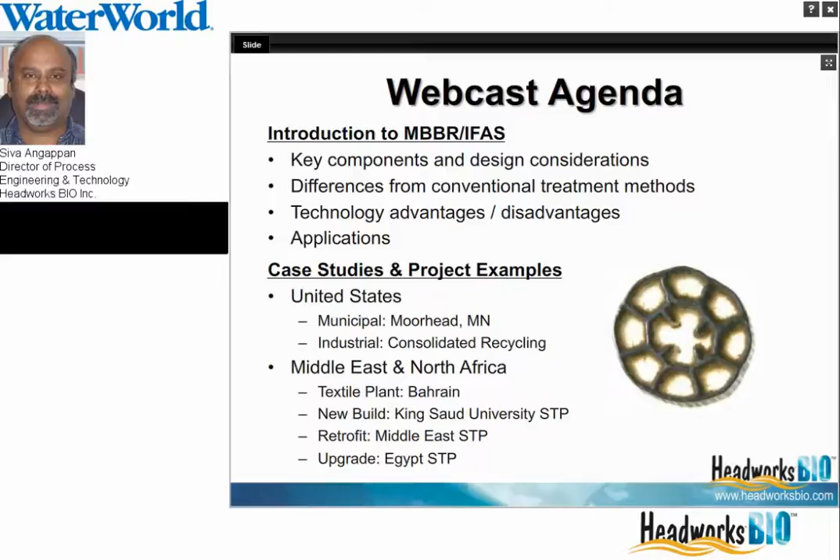Biological treatment technologies for wastewater treatment can be classified into two parts: suspended growth, which includes activated sludge, and attached growth, which includes fixed film technologies. In activated sludge, we have a number of variations, including SBR and MBR. In fixed film or attached growth technologies, we have trickling filters, rope media, RBCs or rotating biological contactors, and MBBR. Most of these technologies can be combined, that is, attached growth and suspended growth can be combined to form a new technology called IFAS, which is Integrated Fixed-Film Activated Sludge.

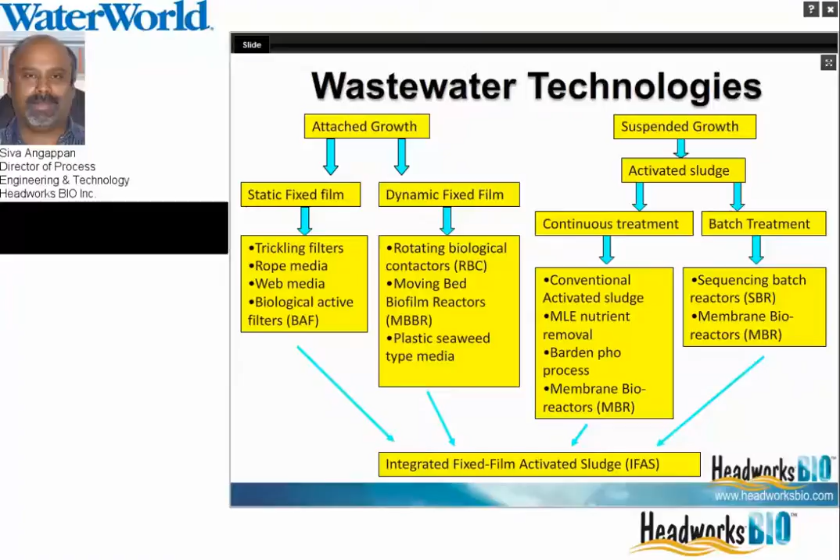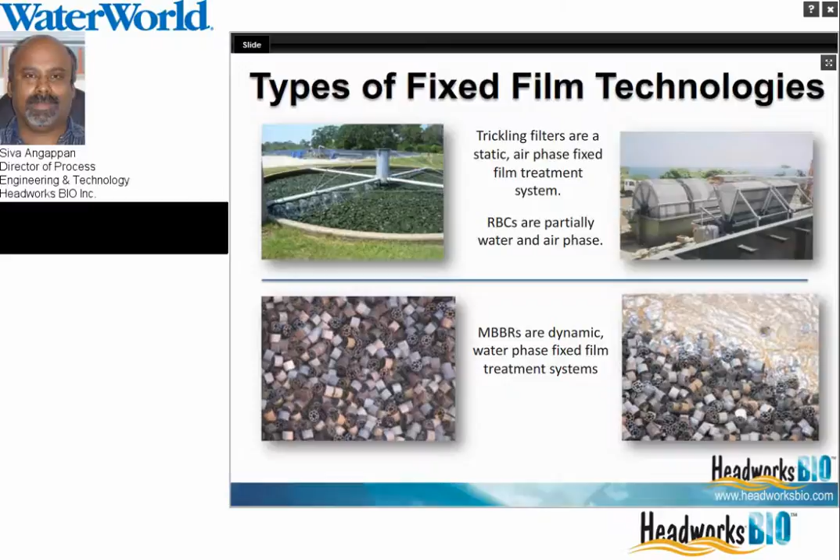There are a number of different technologies that use a bed type of approach, like fluidized bed. In this moving bed, the entire bed is moving around continuously and vigorously. Typically, the carriers used, or the plastic media used, have a specific gravity of less than 1, so it's easy to mix within the reactor.

There's a number of documented research, case studies, and presentation publications regarding moving bed biofilm technology.

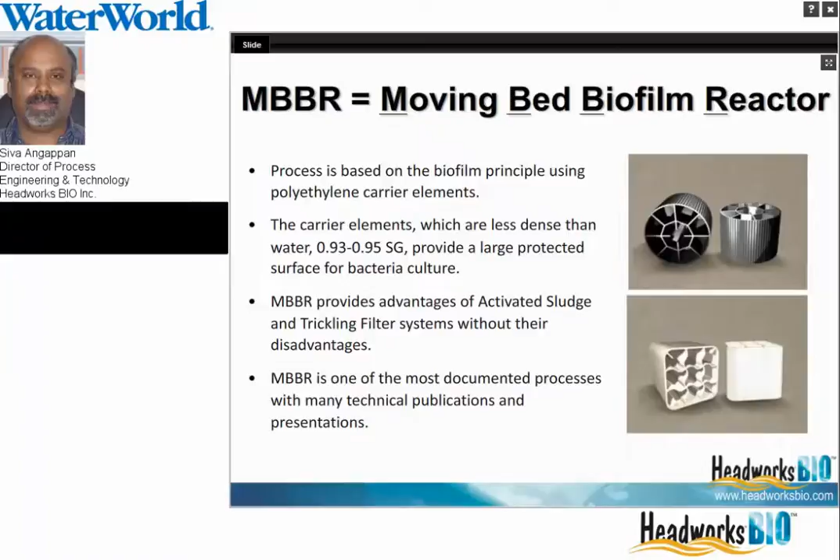How does a biofilm work? The biofilm is formed on the surface of the plastic media, where hundreds of layers of biofilm are formed during acclimatization. The biofilm is basically a boundary layer between the surface and the substrate. The substrate contains all the contaminants to be oxidized, and the biofilm contains all the bacteria. The substrate is continuously mixed around, and all the contaminants like BOD, COD, and different organic compounds get into the biofilm, and oxygen also diffuses into the biofilm. On the surface of the biofilm, bacteria oxidizes the contaminants, and the products of the oxidation are sent back to the substrate and go out of the reactor. This is the general principle of the biofilm.

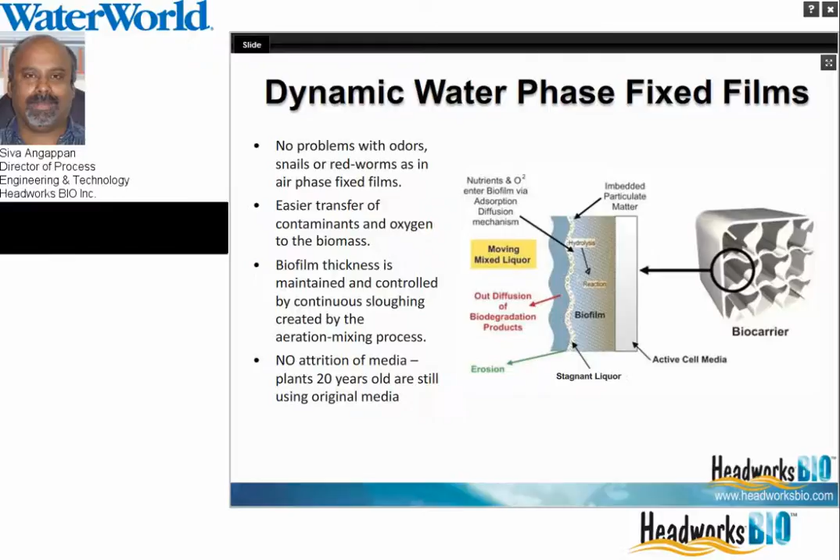The key components of a biofilm reactor are the aeration grid, the retention screens, and ActiveCell media, which is our specific brand media. The aeration grid provides the air required for oxidation as well as for mixing. The retention screens keep the plastic media inside the reactor and let only the treated water out. The media is where the biofilm resides.

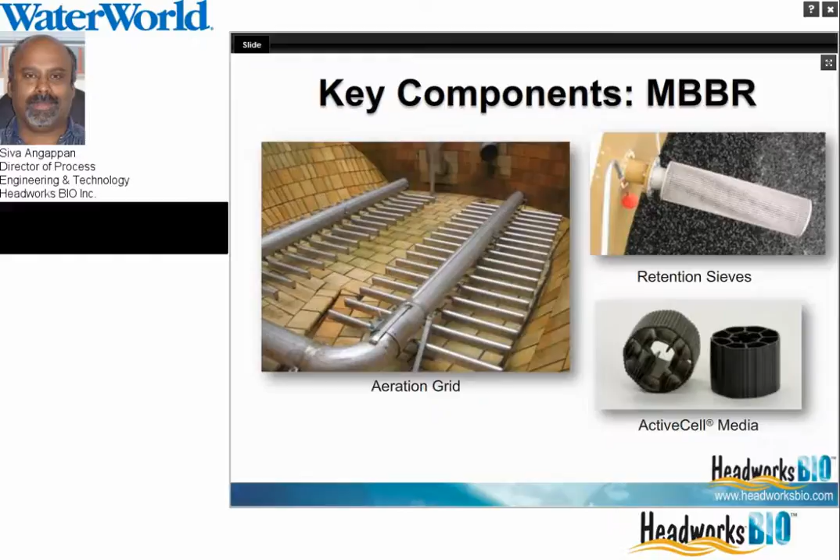In more complicated projects, you will have a requirement for an anoxic reactor, where nitrates are removed by anoxic bacteria to form nitrogen gas. In certain other configurations, you will have retention screens that can be retracted for easy cleaning and put back in service.

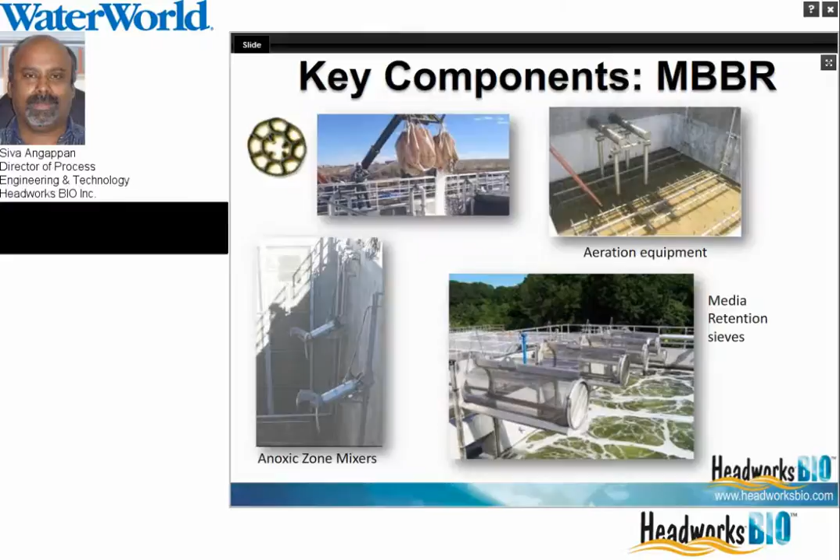How does a biofilm look like? For the BOD bacteria, the biofilm looks either greenish or grayish. In the nitrifying bacteria, the biofilm is usually red. It takes a few weeks for the biofilm to form during an acclimation process. After that, the biofilm is self-sustaining and automatically adjusts to the load.

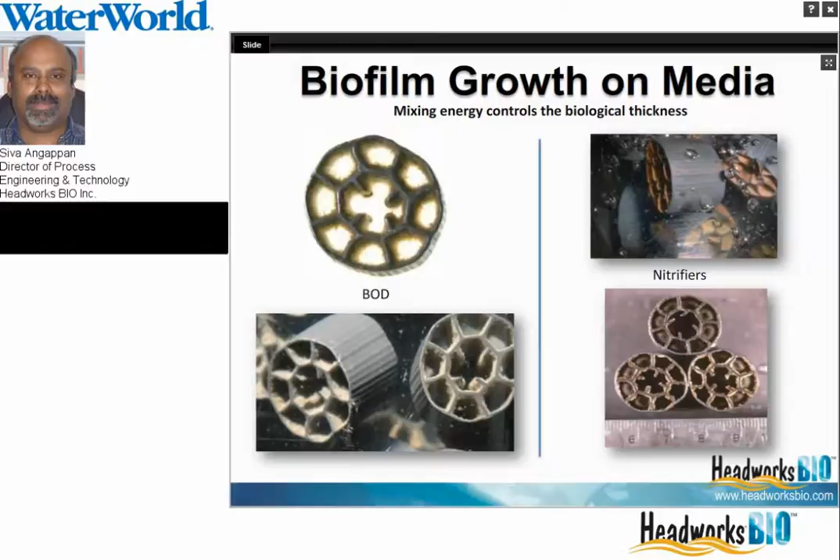So what is the difference between IFAS and MBBR? MBBR is a once-through process; there is no recycle of the waste sludge or recycled sludge. In IFAS, the activated sludge or the MLSS is recycled back to the front of the reactor. So you'll have two levels of biological activity: one in the suspended growth with the MLSS, and the other in the attached growth on the biofilm.

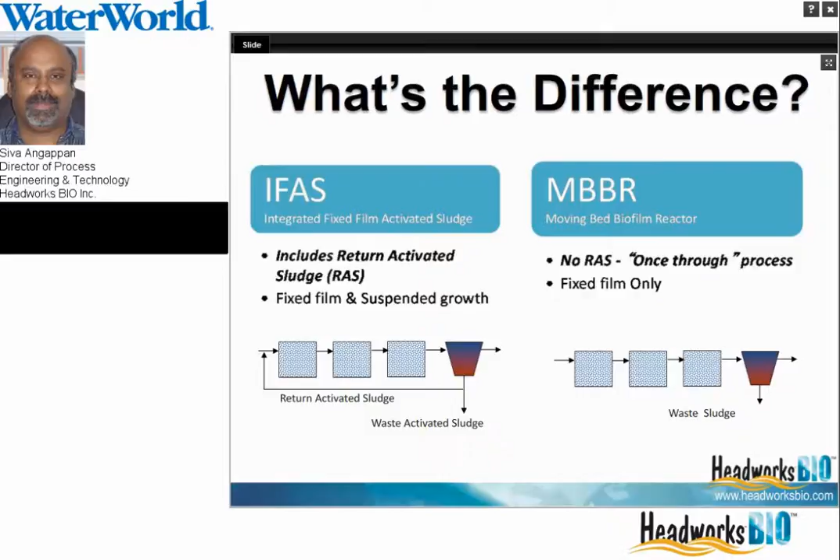So why would you select MBBR over IFAS, or IFAS over MBBR? The key parameters are how much space you have, and whether it's a new site or an existing site. If you already have an activated sludge plant with clarifiers and all the supporting works, it makes sense to go for the IFAS process. So all you need to do is add media and additional air if required and retention screens. By doing that, you can expand the capacity of the system within the same tanks or same footprint. You can also meet additional requirements for nitrogen removal or phosphorus removal.

In MBBR, the process is very simple to operate because it's a once-through process. There is no recycle, so you don't need skilled operators. There are a number of MBBR plants we have which need only 15 minutes of operator attention per day. Whereas in IFAS, there is a need to maintain the MLSS at a constant level. So if we have skilled operators, it makes sense to go for IFAS, and if you don't want a full-time operator, then it makes sense to go for MBBR.

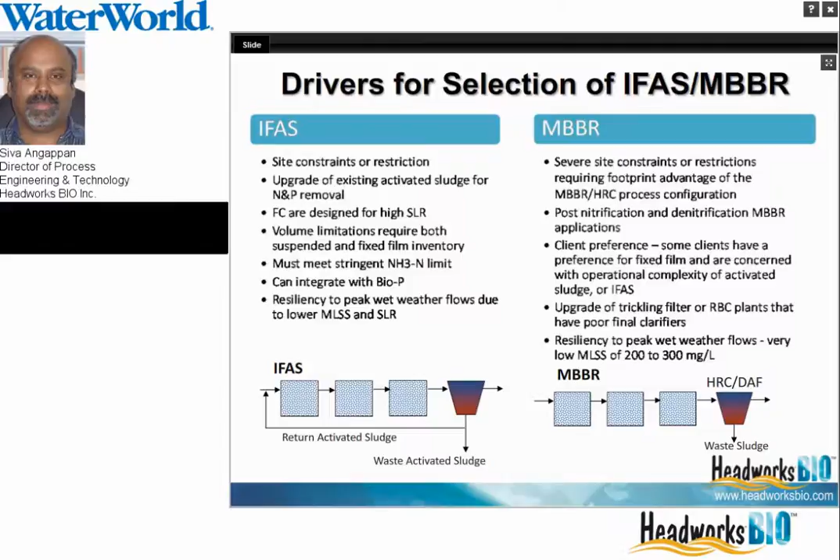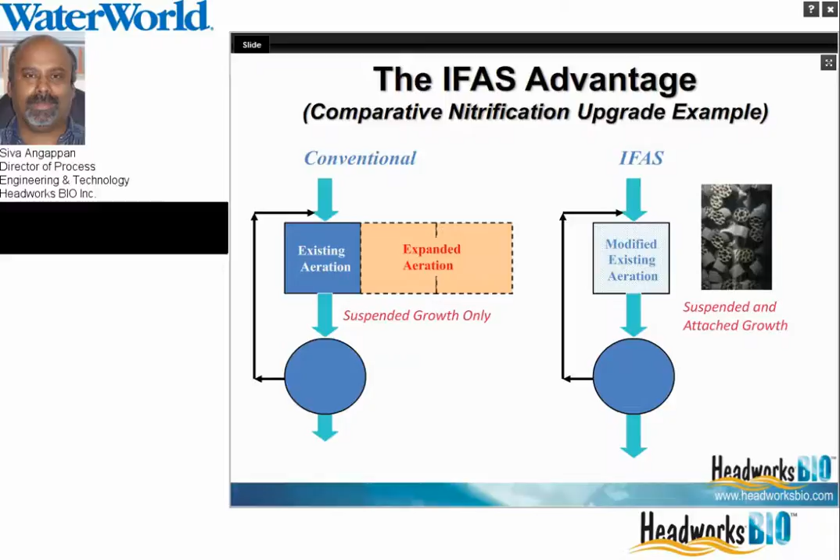This is a conceptual example of modifying an existing conventional activated sludge system into an IFAS. The blue square on the left is the existing aeration tank at an activated sludge plant. If you want to expand the process with activated sludge alone, you will have to add more tankage to meet new requirements or expand the flow capacity. Whereas with IFAS, you can keep the same tank and add the media into it, meeting new requirements as well as increasing the flow capacity within the same volume.

This is a more concrete example of how to do it. Let's say you have a 10,000 cubic meters per day water flow and 200 cubic meters of tankage, meeting only BOD requirements. We can convert that into IFAS by dividing the existing tank into two tanks, one for BOD and the other for nitrification, adding new requirements for ammonia nitrogen. The flow can be increased by 50% to 15 MLD, or 15,000 cubic meters per day. By doing this, we have met the new requirements for ammonia as well as increased the flow by 50%. This is one of the most common implementations of the IFAS process.

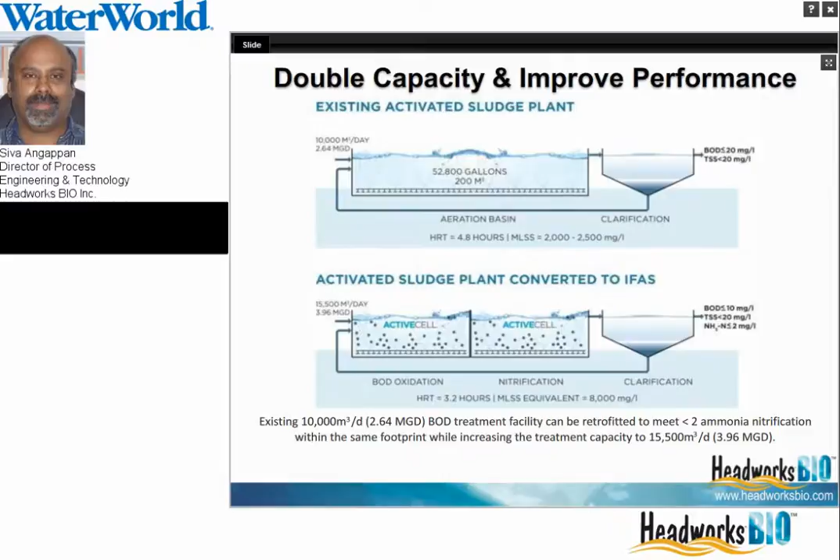So how do we design MBBR or IFAS processes? It's just like any other biological technology, you need to consider temperatures, dissolved oxygen, and nutrients. In biofilms, hydraulic retention time is much less than activated sludge plants for a simple BOD or nitrification process. Typically, it's a half to a quarter of what's required for activated sludge plants.

More importantly, the primary design factor used for designing MBBR and IFAS is the loading rate. That is grams per day of BOD or ammonia or nitrogen per square meter of the surface area of the media. So what you do is take the total load in grams per day and divide by the total amount of surface area of all the carriers in the reactor. That's the design factor we use.

So if you are designing a high rate system, you could use as much as 15 to 25 grams per square meter per day for BOD. Or if you are trying to meet very low limits and you're trying to do it in a single reactor, that should be a low loading rate situation. For nitrogen, biofilms can easily handle up to 1 gram per square meter per day.

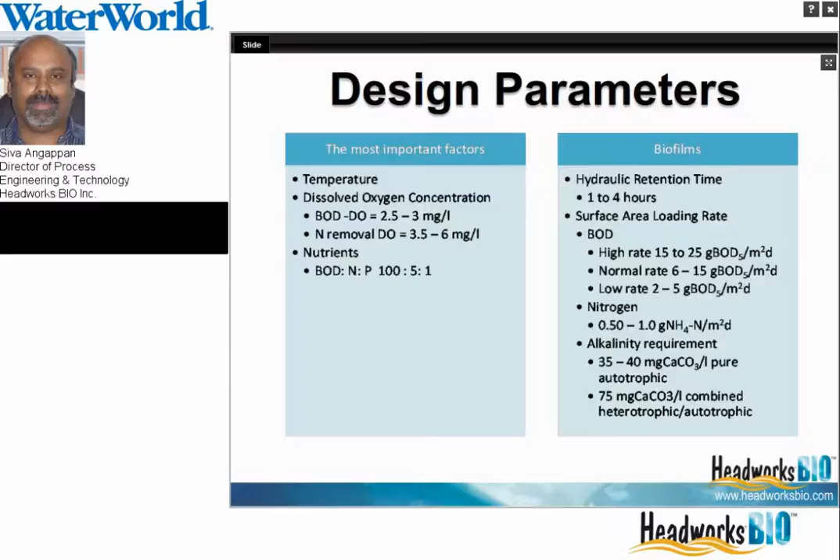So in the next part, Afnan Din will go over the MBBR and IFAS technology in more detail.

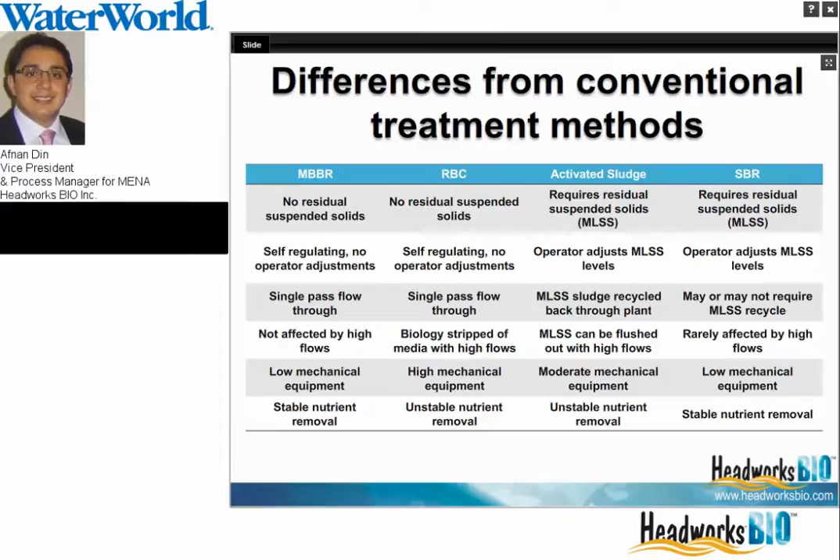Hello everyone, thanks Siva. I'll talk to you a bit about the differences from conventional treatment methods when you compare MBBR. What I've done is split the technologies into four, and we're looking at two attached growth processes and two suspended growth processes. MBBR and RBCs are two common attached growth processes, and activated sludge and SBR are two suspended growth processes. The differences in the technologies really stem from the fact that one set is an attached growth process and one set is a suspended growth process.

So if we compare MBBR with RBCs, one of the key differences is the footprint. MBBR is a super small footprint compared to an RBC. The second key difference is in the operation and maintenance. Compared to an RBC, an MBBR has absolute low mechanical equipment. There's no maintenance required of the media or the retention sieves. The only maintenance required would be with the diffusers, if any. Whereas in RBCs, there are motors, there are rotating contactors, so there's far more maintenance required with an RBC.

Now, in terms of activated sludge and SBR, both of those are a suspended growth process. Again, compared with MBBR, MBBR offers the smallest footprint of the three. The key difference between an activated sludge and an MBBR would be in the operation and control. An activated sludge requires you to control your mixed liquor and have a sludge age, whereas an MBBR process is an attached growth process. In terms of nutrient removal, an MBBR process is far more stable than an activated sludge process.

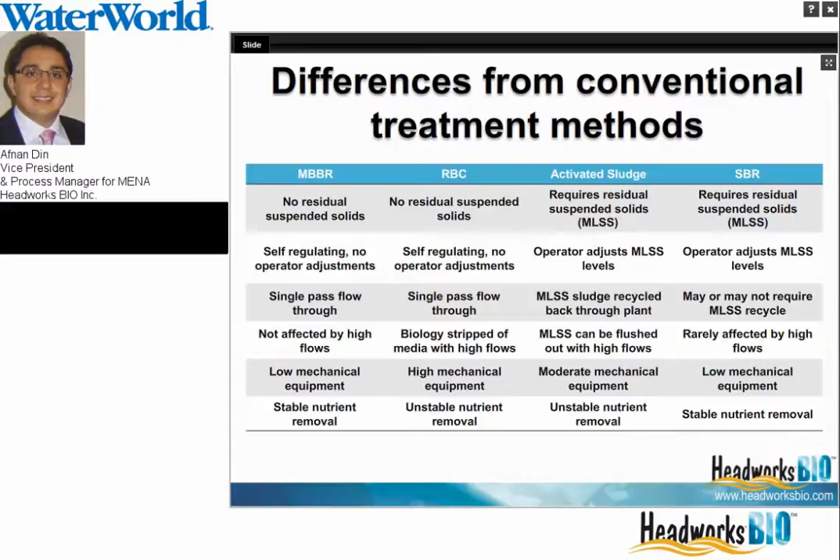Moving on to comparing two of the most popular technologies these days, the membrane bioreactor and the MBBR. One of the key differences is the capital investment. Although membranes over the years have become far more cost competitive, they are still very high in capital cost compared with the media for an MBBR. The footprint, both plants offer you small, super tight footprints. An MBR can operate with a mixed liquor of up to 12, 15,000, if not higher, and an MBBR operates with an equivalent mixed liquor, because it's an attached growth process, of about 8 to 10,000.

In terms of power requirements, as we know, blowers consume the most power on a wastewater treatment plant. If you look at the number of blowers or the amount of power required on a membrane bioreactor compared with a moving bed biofilm reactor, both processes require blowers for aeration to provide oxygen for oxidation and removal of organics, but there's far more power required in an MBR because you have recirculation pumps, and most importantly, depending on the type of membranes you go for, you have air scouring blowers, which basically prevent your membranes from fouling. Neither of those are required for MBBR.

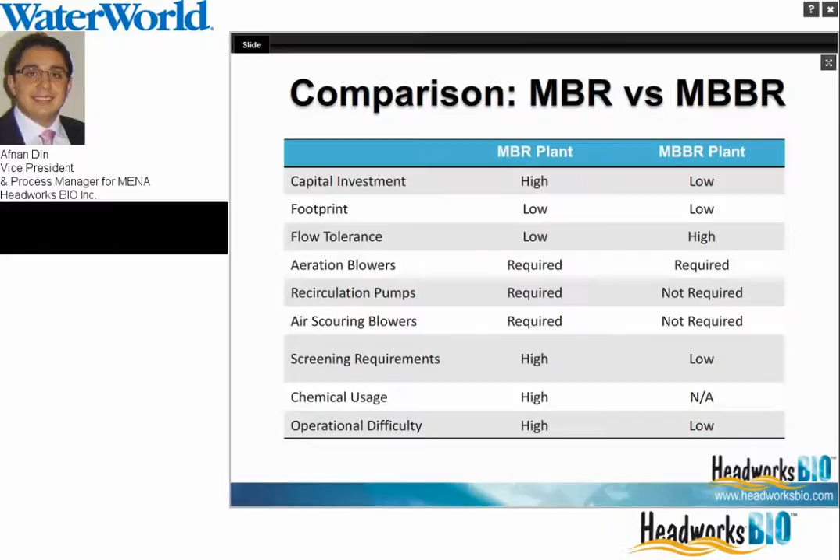So we looked at MBBR earlier, and Siva touched on the difference between IFAS and MBBR. Just to recap, the key difference is that one is a straight-through process and one has a return loop. The return loop of the activated sludge from the clarifier provides you with the suspended growth. That's the key difference between IFAS and MBBR. In IFAS, we say Integrated Fixed-Film Activated Sludge, so it contains both suspended and fixed film.

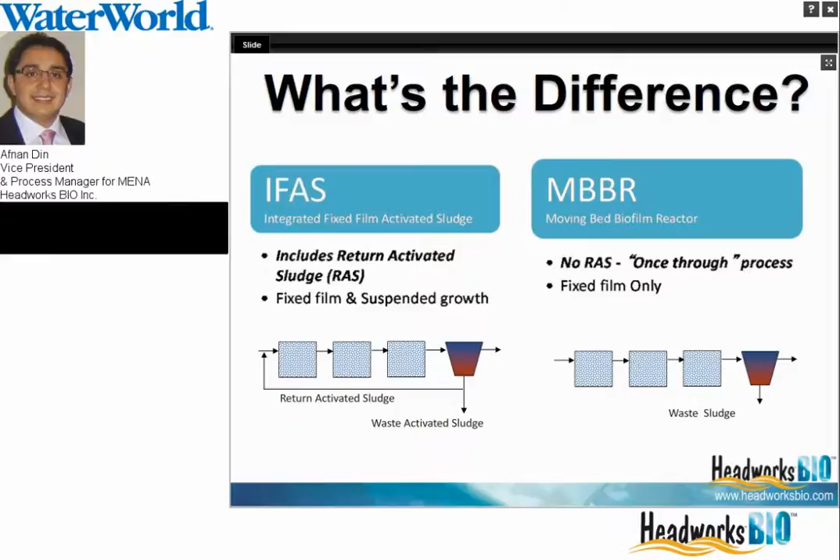The advantages of IFAS and MBBR - why would you consider an IFAS or MBBR? One of the key advantages is that it's a self-regulating process. The biomass is self-regulating, so there's no requirement to actually control your mixed liquor. Because it's an attached growth process, the thickness of the biofilm attached to the media is either thick or thin, depending on your influent load. That's a natural process.

One of the key benefits is that it offers a flexible design to allow future upgrades. If you have an existing MBBR or IFAS reactor, and as we all know, plants after a period of time need to be upgraded - populations go up, incoming flow increases, effluent standards get tighter - it's very easy in terms of flexibility to retrofit these plants, because by playing around with the fill fractions of the media, you can create a higher specific surface area for the growth of biofilm.

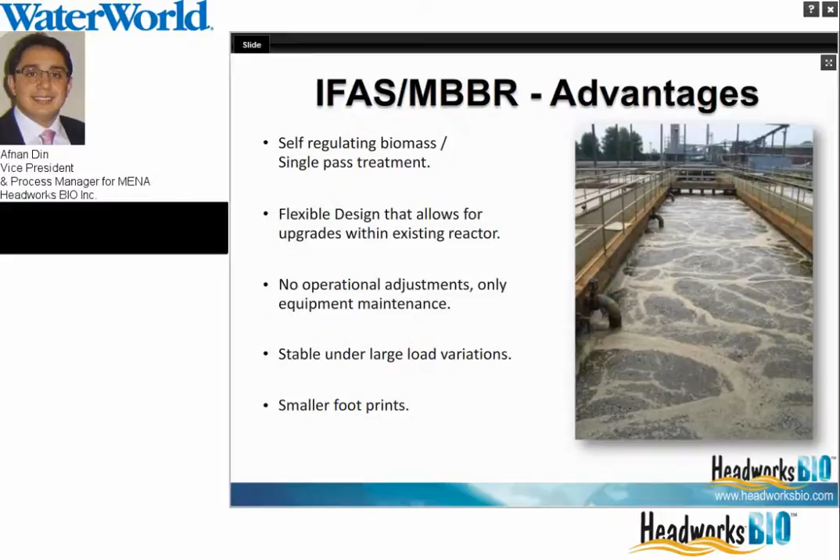In terms of operational adjustments, an MBBR is a fairly simple process to operate, especially because the control is not necessarily required as much as you'd find on other technologies. It's stable under large load variations. Typically, if you have a labour camp or a hotel resort, which is likely to have seasonal variations or peaks and low loads at certain times of day due to usage, a biofilm process operates a lot better because of the self-regulating biomass nature. And as we understand, it's a very small footprint - very compact because the media allows you to have a higher specific surface area.

Now looking at the different types of applications where you could use MBBR. Well, the first application is simple - BOD, COD removal. So an MBBR is a biological process that removes all various types of organics.

The second type of application could potentially be as a post-nitrifying reactor. There are various flexibilities with MBBR as to how you apply it. For example, if you have an existing lagoon which is only for carbonaceous removal, and you'd like to nitrify the effluent, you could add an MBBR as a post-nitrifying step downstream of the lagoon.

And lastly, you could simply have a process where you denitrify, remove BOD, followed by nitrification and post-denitrification, depending on your nitrogen limits. If you notice on the denitrification drawing, it's very similar to an MLE process - like an activated sludge process in terms of configuration, but with added media inside the reactor. So you still have an internal recycle, you still have a return activated sludge, and if need be, you'll have a carbon source.

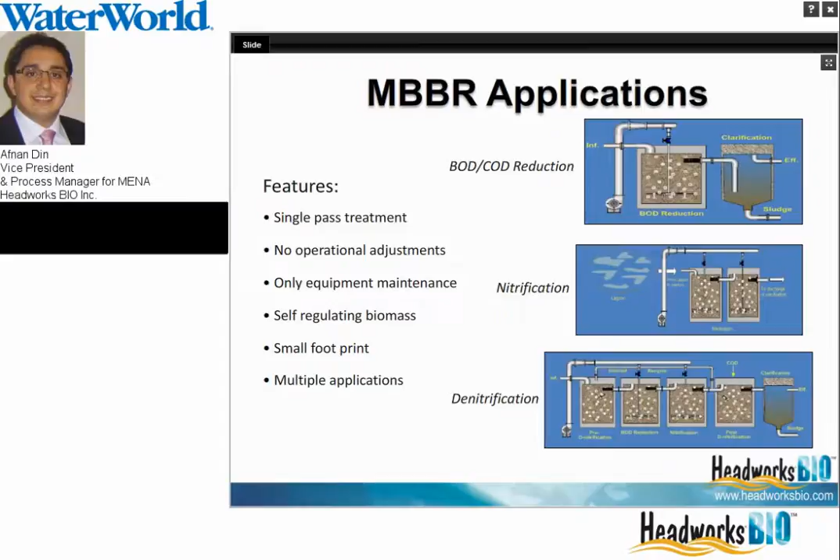What we're seeing on this slide is an example of an IFAS application. We have an existing plant for carbonaceous removal only, with BOD and TSS removal, so the effluent limits are less than 30 milligrams per litre.

Now, if we have an existing activated sludge plant operating like this, which needs to be upgraded or retrofitted to give better performance, let's say less than 1 ammonia, we can retrofit the existing activated sludge plant into an IFAS and improve the effluent quality all within the same space.

There are various ways we could do this without increasing the space requirements. For example, in the first case, we could convert the existing plant from a carbonaceous removal only to a nitrification plant, giving you ammonia less than 1 within that same space.

If you wanted to denitrify, depending on your total nitrogen limit, you could split that reactor into 3 steps of pre-denit, BOD reduction and nitrification, or 4 steps of pre-denitrification, BOD reduction, nitrification and post-denitrification.

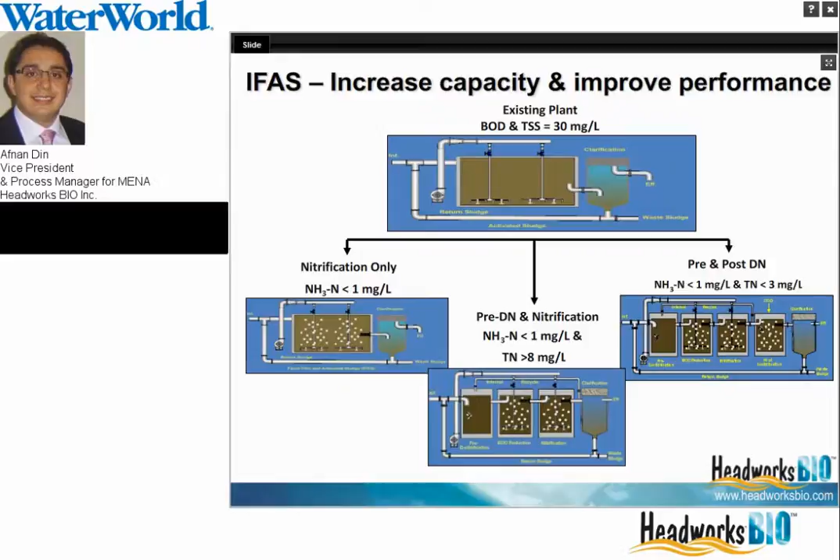For example, if you have an existing activated sludge plant and you would like to retrofit this for nutrient removal, this is a very common requirement these days. Consents are getting tighter, environmental agencies are imposing tighter limits, and there are requirements for nutrient removal.

One way we could retrofit an existing plant into nutrient removal is similar to how I explained earlier. We would create inside the aeration tank separate tanks of BOD reduction and nitrification by converting them to IFAS. This allows an available volume for anaerobic treatment and pre-denitrification.

This allows for suspended growth sludge age such that you can tailor it for maximum phosphorus removal. You allow suspended growth in your BOD reactor, nitrifying reactor, and then you can create a volume for your anaerobic treatment.

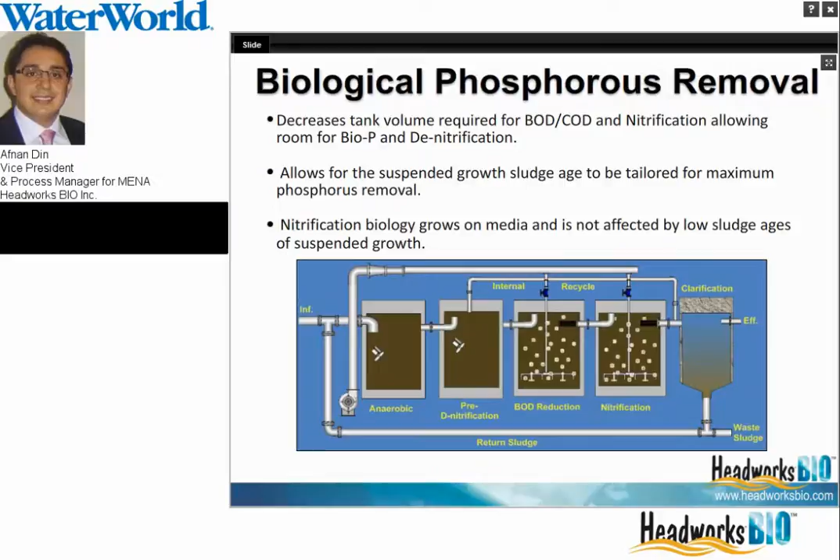I'll pass you over to Siva, who will be talking to you a bit about our project in the United States.

Thank you, Afnan. I'll be talking briefly about our municipal project in Minnesota and an industrial project in Indiana.

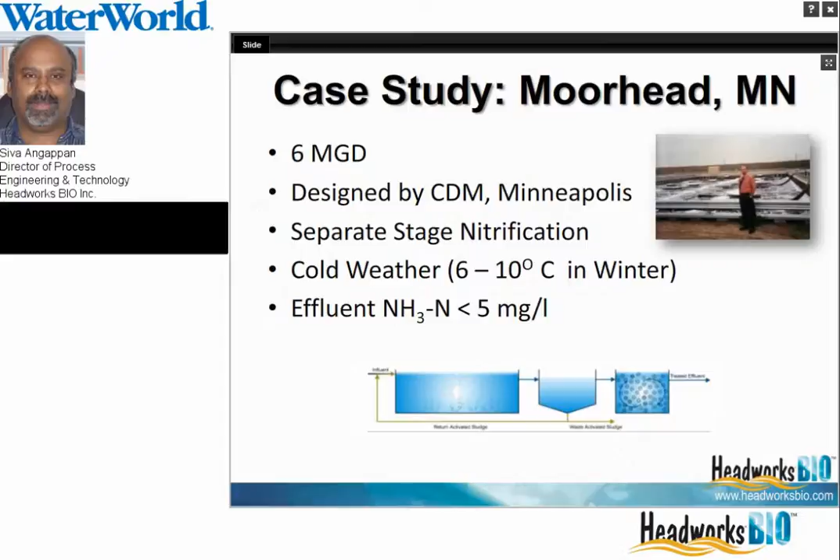Moorhead, Minnesota is in very cold weather. The wastewater temperature can reach less than 10 degrees most of the winter. They have an existing Purox plant which was meeting BOD limits, and they had a new requirement for ammonia. So we decided to install an MBBR for this particular project as a separate stage.

What that means is this nitrification process is after the secondary clarifier. Initially they looked at the existing lagoons to nitrify the wastewater, but it's not going to work based on the temperature. So we installed the MBBR process for the nitrification.

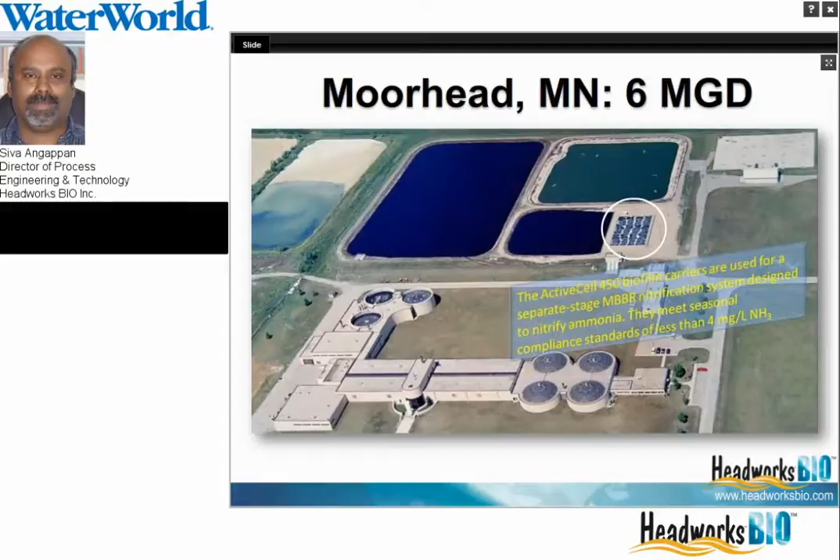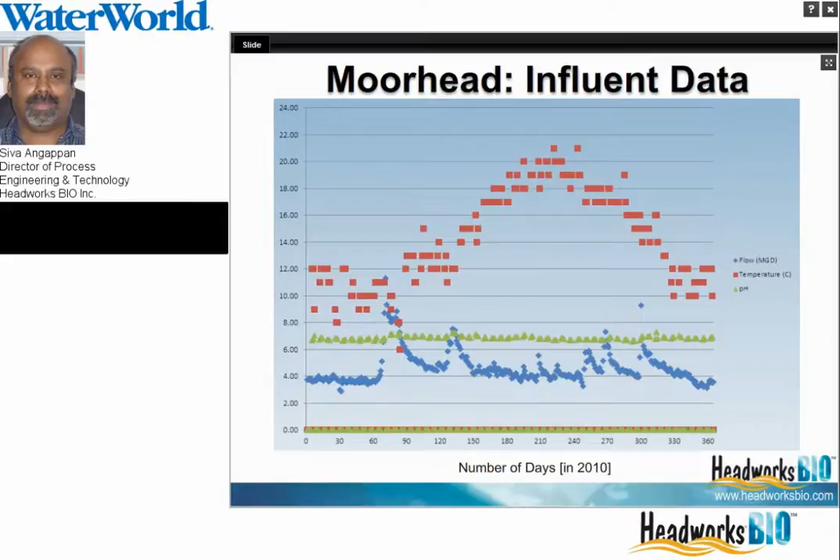These are some data for the wastewater influent. The flow is typically between 4 and 8 mgd. The temperature is highly variable depending on the season, so in winter the temperature can reach 6 degrees centigrade. The pH is quite constant.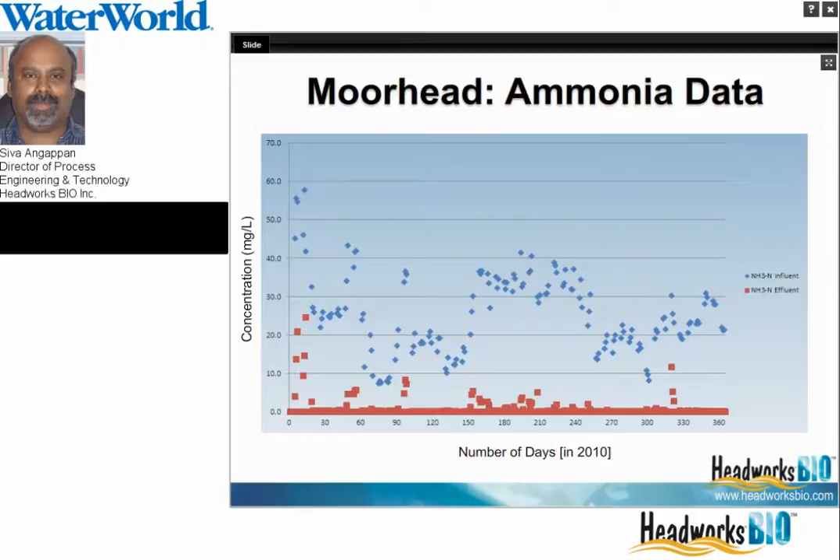We sampled the wastewater at different points throughout the year, for different seasons, and this is how the data points look. The general conclusion is that if you have a high loading rate, the removal rate will drop.

This information can be used in two different ways. You can design two reactors, the first being high loads and the second being low loads. So if you have a very stringent limit, you should either use low loading rates with a single reactor, or you can use two reactors, the first one being high load, second one being low load.

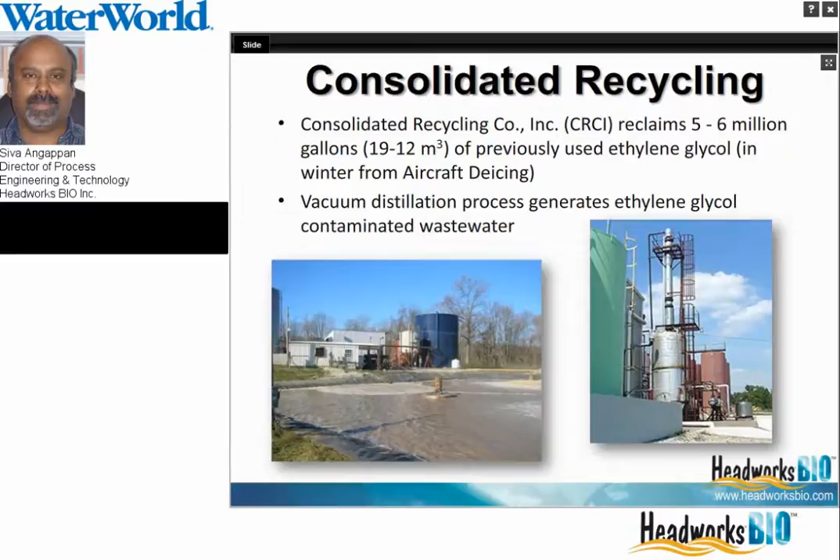This particular plant is quite complicated because it's an industrial application, and there could be a lot of inhibitory substances. So we decided to do complete design based on testing rather than designing a complete system and trying to operate it. We started with a plan to do batch testing to get preliminary design factors, then continuous flow testing, and use that information for the full-scale design.

The COD is 15,000 milligrams per liter, and the BOD is around 10,000 milligrams per liter. They had a requirement to meet COD of less than 550 milligrams per liter, and phenol of less than 2 milligrams per liter. As you know, phenol is difficult to oxidize using biological oxidation, so that's an important consideration.

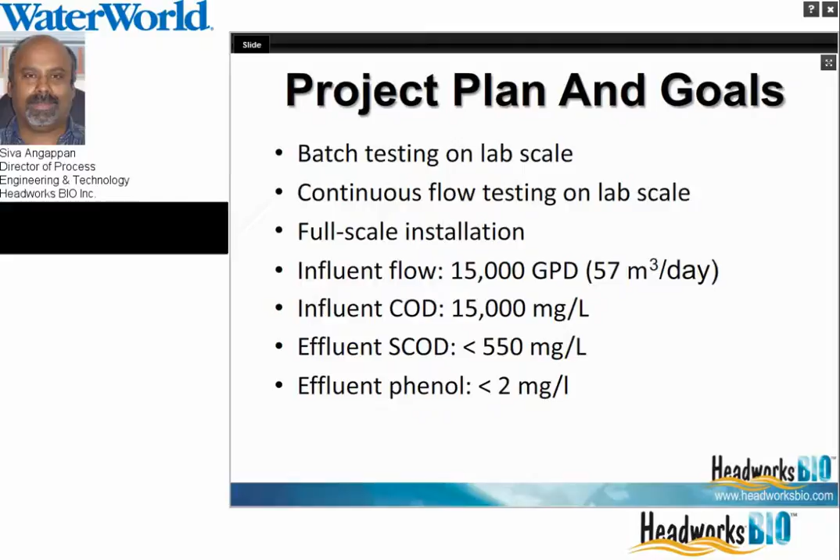In the lab testing, we made a simple tube-type reactor, 14 liters in volume, put in the media inside, and used spargers to disperse air into the reactor, and nutrients were added.

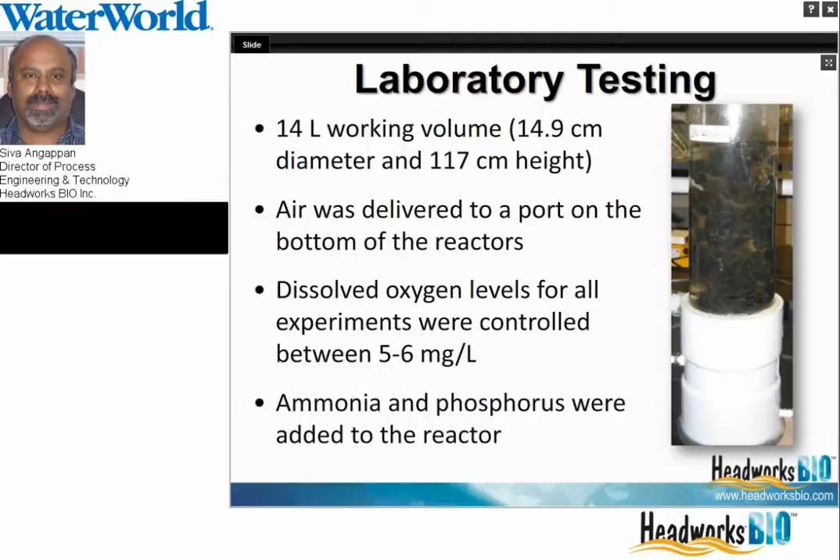Batch testing is simple: you start with a batch of wastewater and see what happens to the concentrations of COD over time. Based on this testing, the COD over time drops from 12,000 down to less than 1,000 within about 100 to 150 hours. That gives us a preliminary indication of how to size the next step, which is the continuous flow reactors.

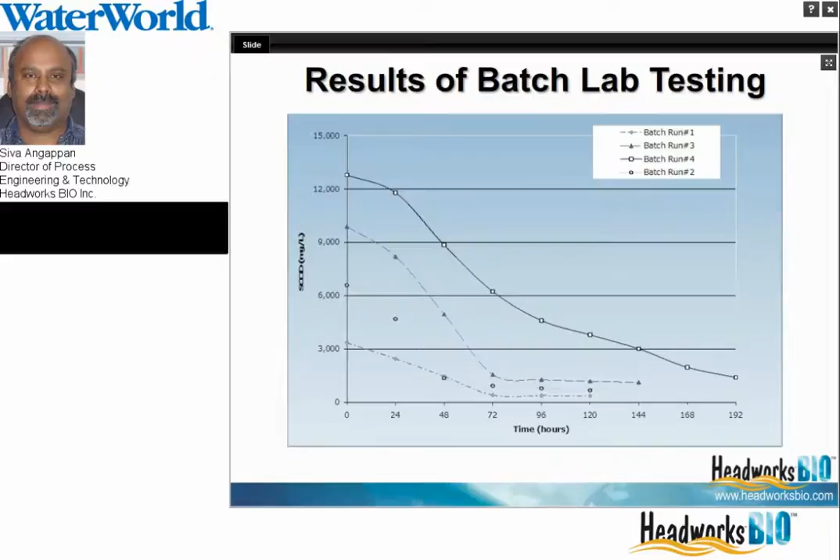Using similar reactors, we prepared an initially diluted sample, and then ramped it up later with full strength wastewater. We started with a 2-to-1 dilution, and then acclimated the reactor over a few weeks.

Once acclimated, you'll see that the COD influent is quite constant in the blue line, and after acclimation the COD effluent also comes down after about a month or so. At that point, the system reached maybe 90% of the design capacity.

We also varied the hydraulic retention time after the system reached most of its capacity. We reduced the flow rate, which increased the hydraulic retention time, to see the effect. In this case, this is a single-stage reactor, so at this stage, the increase in hydraulic retention time did not make any difference to the treatment performance. That proved that our design factor is primarily surface area loading rate, not hydraulic retention time, after a certain retention time is reached.

We also used a flocculation step to see if COD could be reduced further. We saw that COD can be reduced further by 50% by using a chemical coagulation flocculation step.

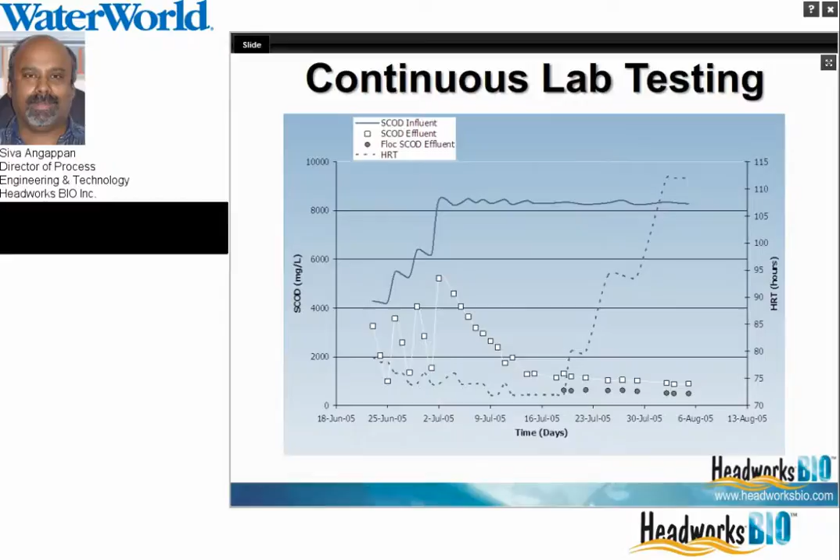Based on this information, we designed a full-scale system as a single-stage reactor, wanting to keep it simple since they didn't have a lot of operators to run the system. We wanted a single stage and also wanted to have a lot of capacity for future expansion.

That's why we went with a carrier fill fraction of around 30%. This reactor is about 95,000 gallons, which is about 5-6 days of hydraulic retention time, giving ample space for expansion. We also included a flocculation step and a clarifier.

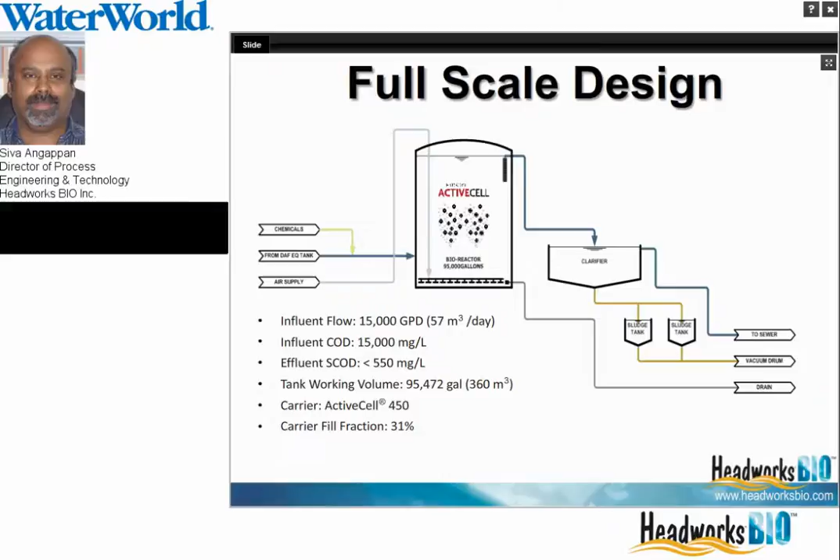We wanted to compare the results of the full-scale system to the lab scale or pilot testing. The full-scale system initially started around 5 to 10,000 milligrams per liter, and on a long-term basis averaged around 8 to 10,000 milligrams per liter. The effluent after acclimation was always less than 500 milligrams per liter.

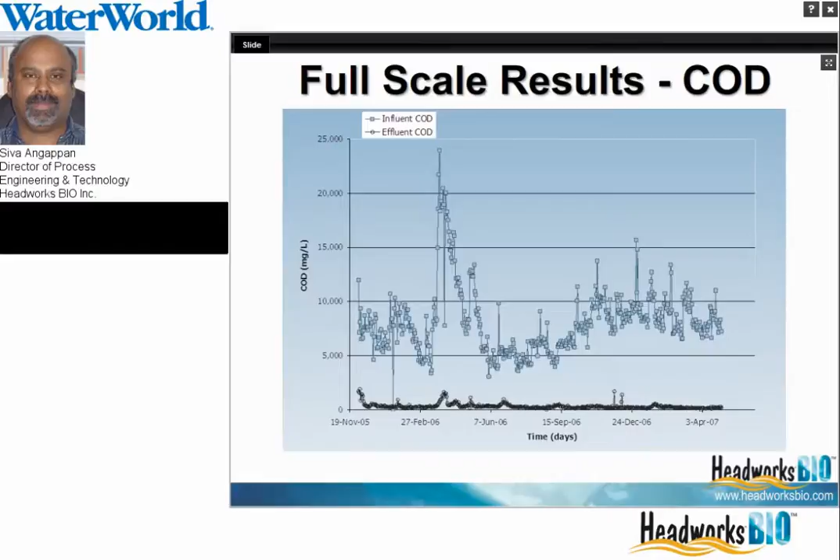And we wanted to see the effect on phenol. Based on those results, we always met the 2 milligrams per liter limit for phenol.

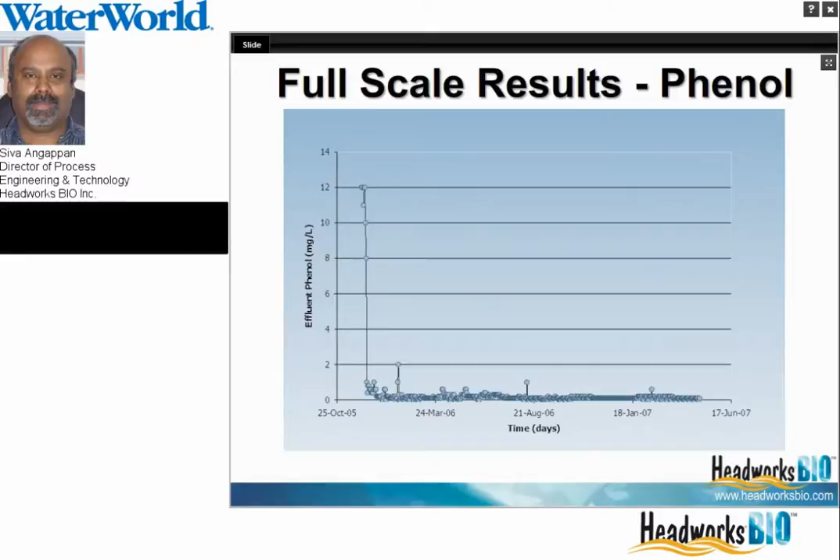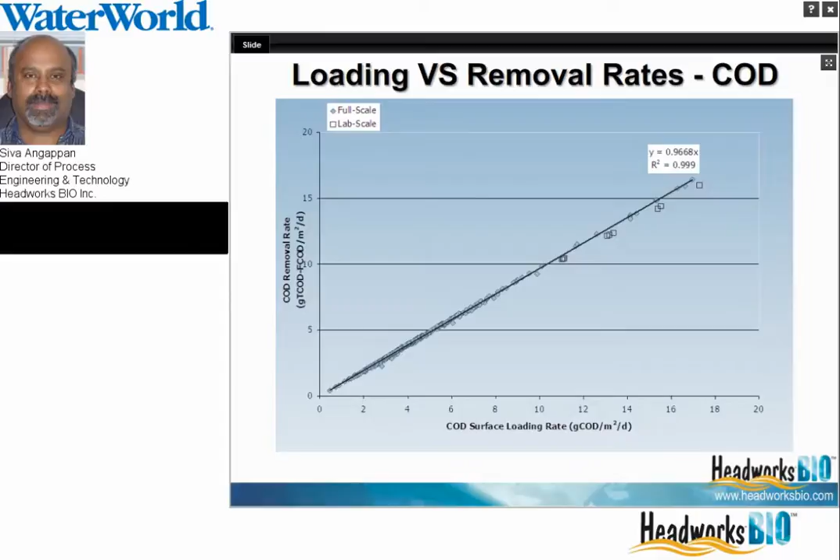Now Afnan will go over a few more projects, mainly in the Middle East and North Africa region. Thanks, Siva. I'll quickly go through these to give you an update on what we are working on in the Middle East and North Africa. A lot of these projects are actually in the execution phase, either undergoing installation now, commissioning, or under construction.

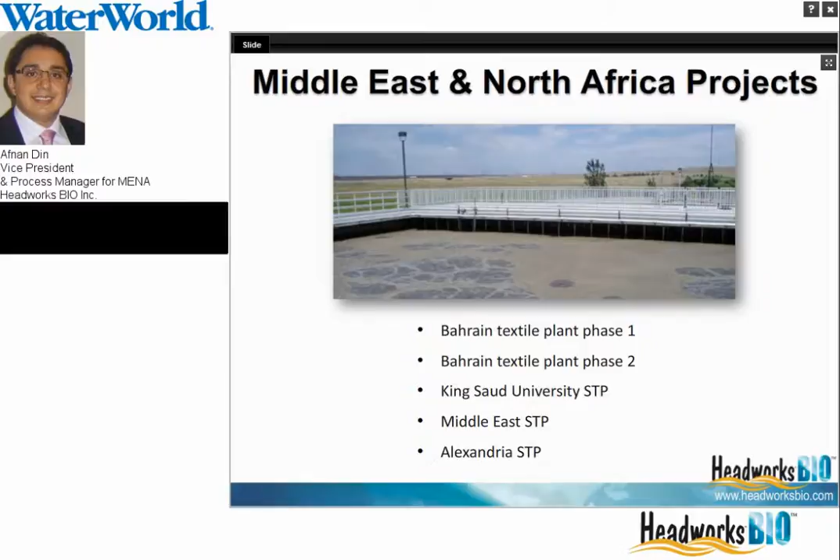So the first project I'll have a look at is a nice blend here - you'll get to hear a bit about industrial treatment, a plant we've done for a university, and another retrofit plant in Egypt. So the first project is a textile factory, a denim factory in Bahrain, an interesting plant.

It's actually an existing MBBR, so there were a few challenges here. One challenge was that the plant was not working, both in terms of treating the influent loads and in terms of the media. There was a problem with the media - it was sinking, so I'll explain why.

Basically, the challenge here was that we had to increase capacity and improve effluent quality. The effluent is discharged into the Bahrain harbour, and the client was incurring fines from the environmental agency.

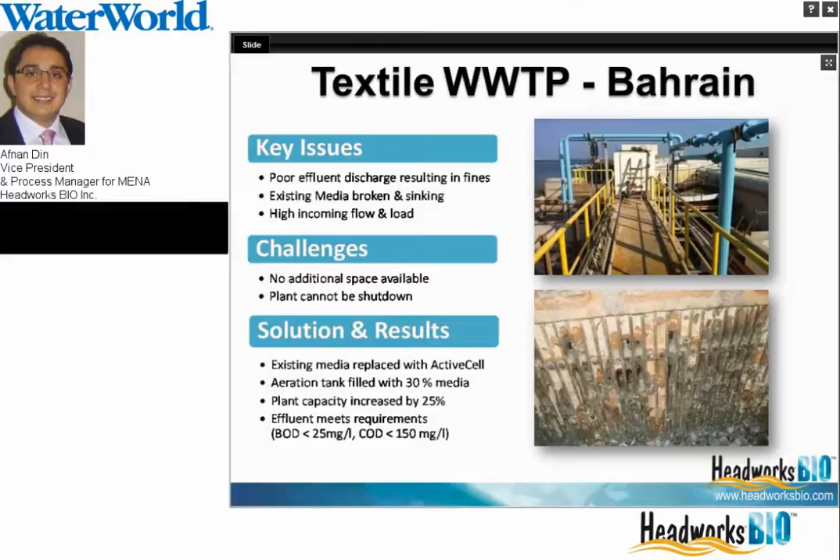So what we did was replace the existing media in the 3 MBBR reactors with 30% ActiveCell media, and we guaranteed an increase in plant capacity by 25%, and that we could meet an effluent requirement of less than 25 BOD and less than 150 COD.

If you look at the current performance of the plant, while it was treating 250 to 300 cubic meters per day, it was giving a BOD effluent of 250 milligrams per liter and a COD effluent of 1,000 milligrams per liter. The limits were far less - less than 50 for BOD and less than 250 for COD.

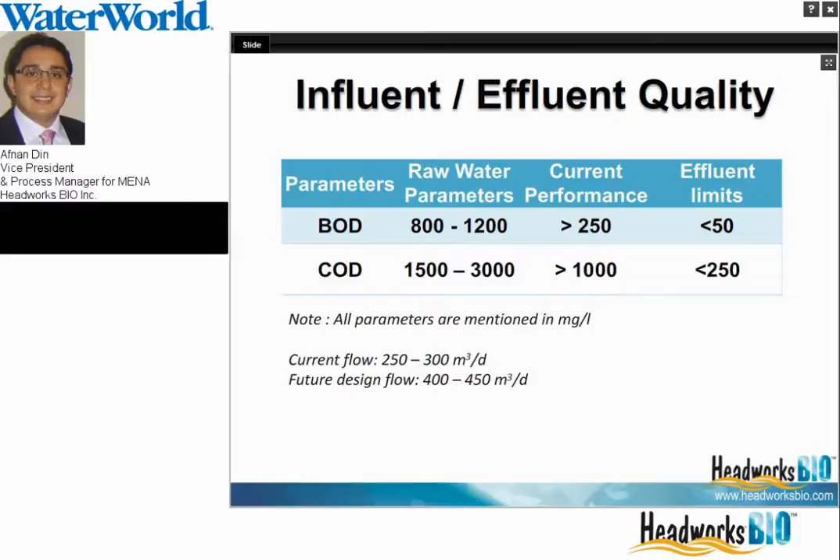So by retrofitting the 3 reactors with MBBR, we were able to increase capacity by 25% to a future design flow capacity of 400 to 450 cubic meters per day. The plant was commissioned earlier this year in January, and these pictures show the media entering the reactors during commissioning. The bottom left shows the seeding process, and the bottom right is the MBBR in operation.

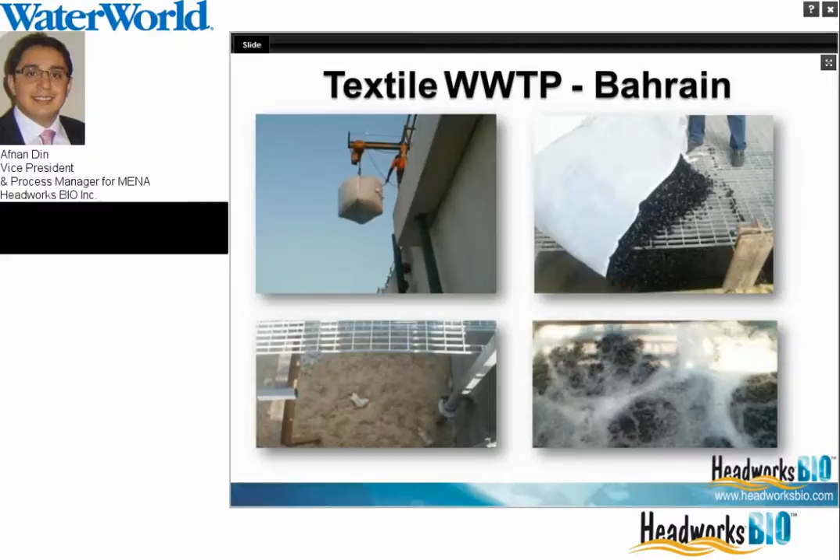A quick summary of the results: initially when we were starting up the process, after the seeding phase, the flows were kept relatively low, roughly about 200 cubic meters per day, then roughly about 75 to about 100 cubic meters per day.

Throughout the whole sampling process, the outlet COD is below the desired effluent quality. Towards the end of January, after about 4 or 5 weeks of feeding the plant with slightly lower flows than designed, we started to increase the flows by the first week of February. The plant is now receiving its design flow between about 300 to 400 cubic meters per day. The inlet COD concentration throughout the whole sampling period was very high, but the loads were obviously lower initially while we were seeding. As you see, the effluent COD is always below 250.

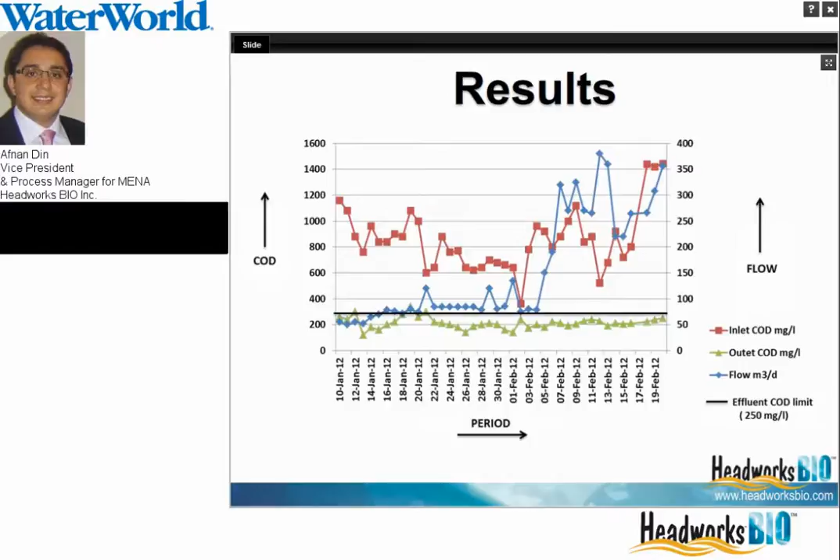As I explained earlier, this plant was very unique for us in the sense that it was an MBBR and it was not working. The client did not have much options on how to retrofit the plant, because with an MBBR you already have a very small footprint. So he certainly could not turn his plant off, could not build new reactors - there was a huge shortage of space. So what we had to do was carry out a feasibility study and look at why the existing plant was not working.

Not only is the specific gravity less than water, so basically it floats, but the specific gravity of active cell is between 0.92 and 0.96.

What happens with the media is that the properties it's made of can potentially, after a few years of operation, have reactions with contaminants inside the wastewater, which changes the density of the media. These reactions cause the properties of the media to change, so over time that media starts to sink. Even though you have aeration and air being provided, the media is not fully mixing inside the reactor, which means your rate of reaction is lower, as well as a deteriorated effluent quality.

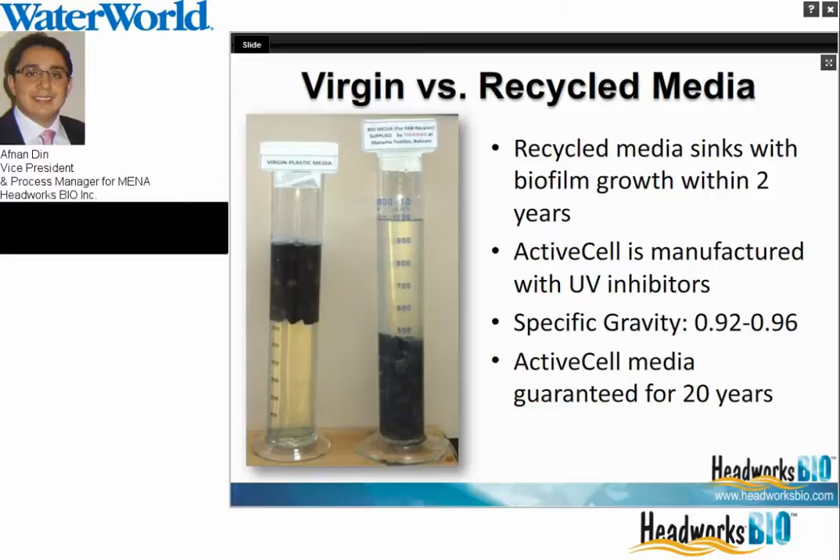One of the next projects I'd like to briefly touch on is what we're doing in Egypt. This again is a very unique application, a perfect example that membranes aren't suitable for every solution. They had an existing membrane plant running for about 5 years — Zenon membranes, hollow fiber — and after about 4 years in operation, the membranes absolutely fell apart. The fouling was immense; they were running these membranes at very high flux rates.

They were cleaning them on a weekly basis using tons of chemicals, and having to replace the membranes and take them out for cleaning. So it was an operator's nightmare. What the client actually did was shut down the plant — for 2 years, the plant was shut down.

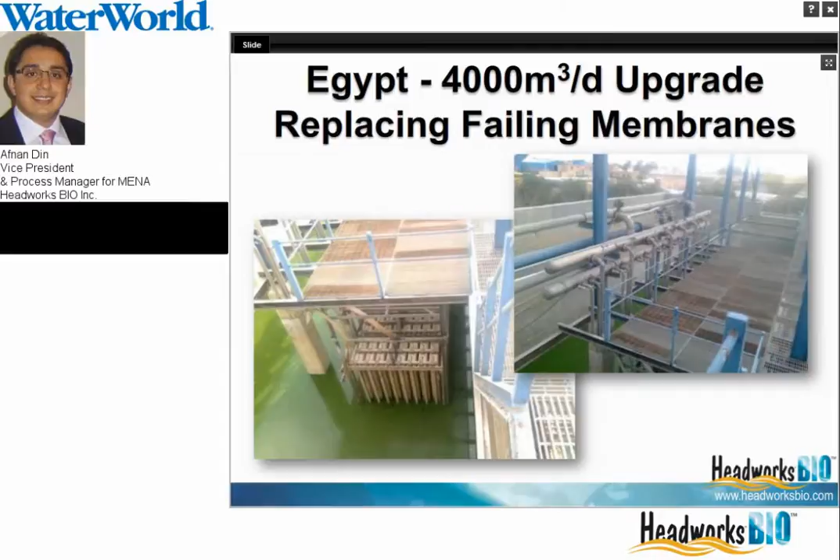Then the client looked into technologies available that could retrofit this existing membrane reactor. The key thing the client wanted was a technology low in operation and maintenance — idiot-proof, easily operated — and secondly, a technology which could fit into the existing MBR reactor. The only technology available that could fit into the existing MBR reactor was an MBBR. So what we're doing is removing the membranes, refurbishing the tank, converting it to an MBBR, and adding a Headworks-designed clarifier to provide the complete solution.

This plant is a 10,000 cubic meters per day plant for a university, based in Saudi Arabia, in the capital city. One of the key drivers for this university — the oldest in the country, located in the capital — was they wanted a wastewater treatment plant with low visual impact, that gives minimal odors, and that's easy in terms of operation and maintenance.

One of the key challenges for the university is that it experiences seasonal variations. Because of the students and summer terms, there will be variations depending on how many students are on campus. So one of the criteria was a technology that could handle such variations in load.

An MBBR really fits well into all those criteria because it has a small footprint, so in terms of visual impact it's very convenient. Secondly, in terms of operation and maintenance, we understand MBBRs are very simple to operate. And thirdly, in terms of total area, it's really just 16 meters by 20 meters. This plant would provide the university with 10,000 cubic meters per day of reuse effluent quality.

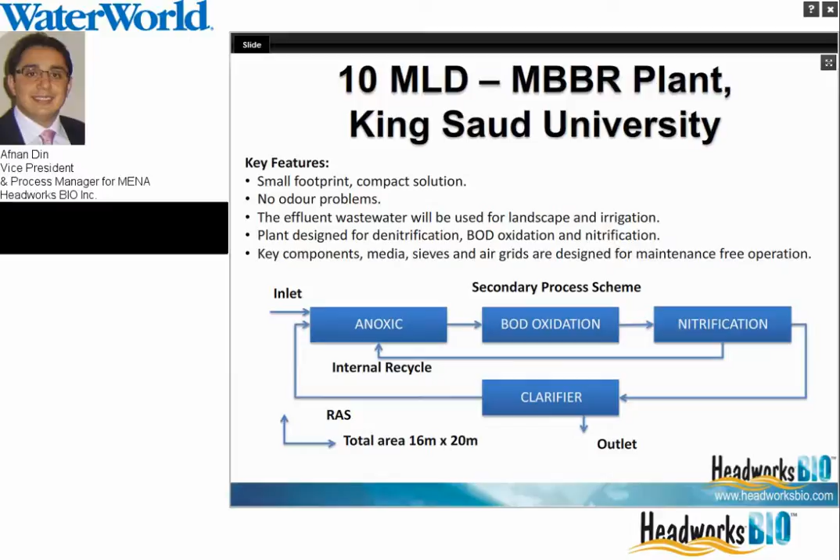This includes BOD removal, nitrification, and denitrification, and all the effluent will be reused for irrigation of the university playing fields. This plant is currently undergoing construction and is planned to be commissioned probably in the next 6 to 10 weeks.

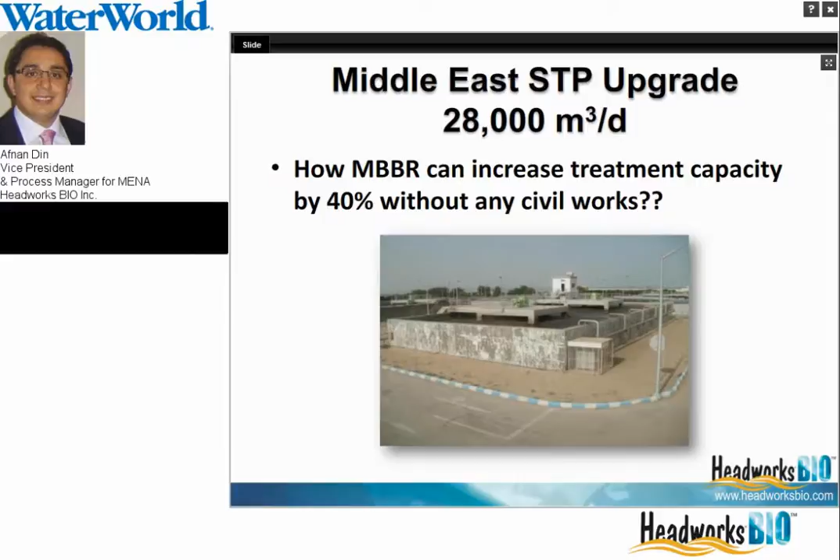One of the other projects, which is very interesting, is where we're retrofitting an existing plant which has a capacity of 20,000 cubic meters per day to 28,000 cubic meters per day. So again, it's retrofitting an existing activated sludge plant by increasing the capacity by 40% without any civil works and improving the effluent quality. The existing plant consists of 4 trains. The total flow is 20,000 cubic meters per day. We'll be increasing it to 28,000.

What I must say here is actually when you increase capacities and flows, the limitation is not on the MBBR or IFAS side in terms of how much you can increase the capacity, but the limitations are normally on the hydraulics of the plant. So that's an important criteria.

That requires a lot of assessment on our part to go through the entire existing infrastructure, to look at where the hydraulic limitations are, to assess each process unit in the existing process stream, from interstage pumping stations to primary clarifiers to screens to all the interconnecting pipe work, to actually assess where the hydraulic limitation is. Because the limitation is never in the capacity to increase the plant in terms of adding media. I mean, we could increase the treatment capacity to 40,000 or 45,000, but the hydraulic limitations limit what we can increase the capacity to.

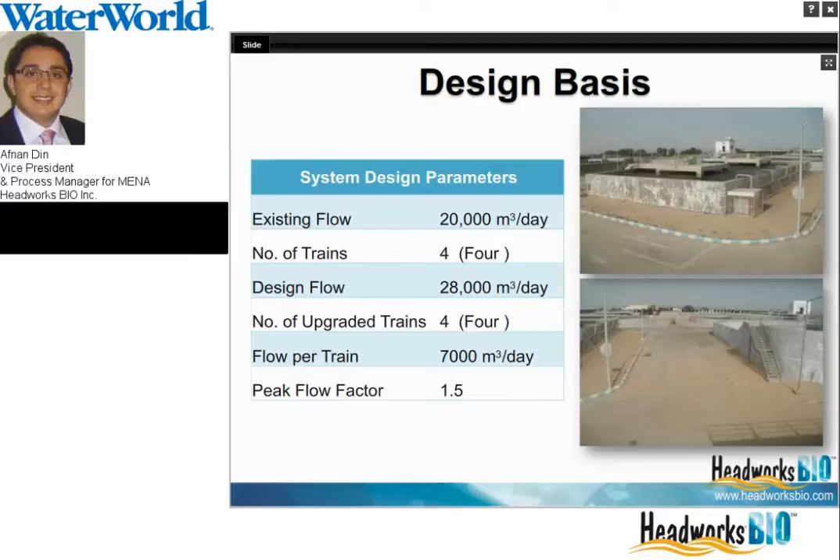If we look at the influent quality here, typically the influent BOD is between 300 to 450, suspended solids is between 350 to 400, and ammonia between 35 to 45. We did carry out extensive sampling. We set up composite samplers to actually look at the influent wastewater data and analyze it to be able to accurately size the MBBR, to know how much flow and load was coming into the plant.

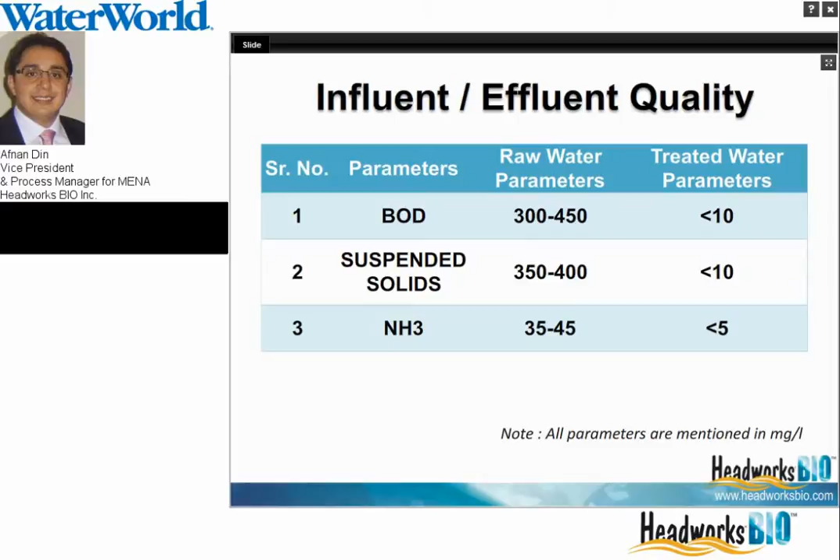The effluent quality required was less than 10 BOD, less than 10 solids, and less than 5 ammonia. This is for restricted irrigation. So what you see here are the 4 aeration lanes: 2 are conventional rectangular aeration tanks, and 2 are typical carousel tanks, oxidation ditches.

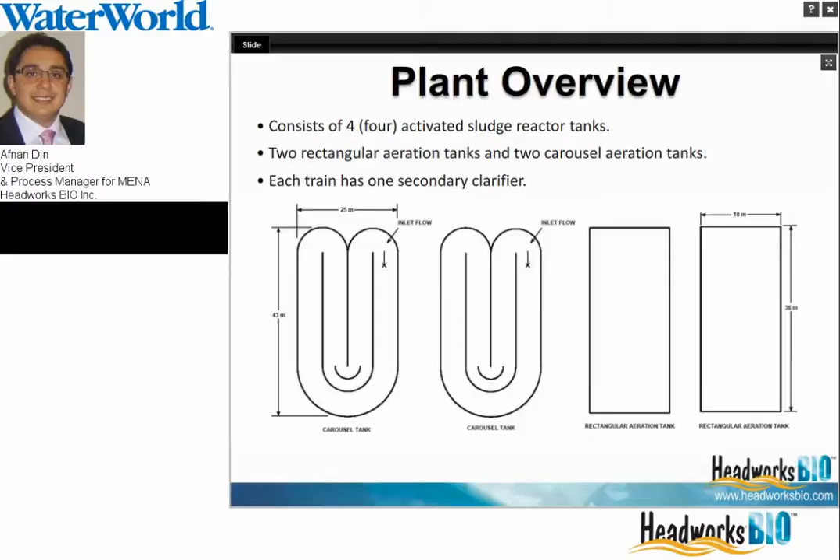So what we're basically doing, if you look at the drawing here, is creating a roughing reactor up front. This roughing reactor, which we call an MBBR roughing reactor, knocks off 70% of your BOD load. So what we're doing is a higher rate reactor, loading it with media, and we're able to reduce your BOD. We remove the bulk BOD, the easily biodegradable stuff, in the initial roughing reactor.

What this then does is it allows the remaining volume of the existing activated sludge plant to be used for nitrification.

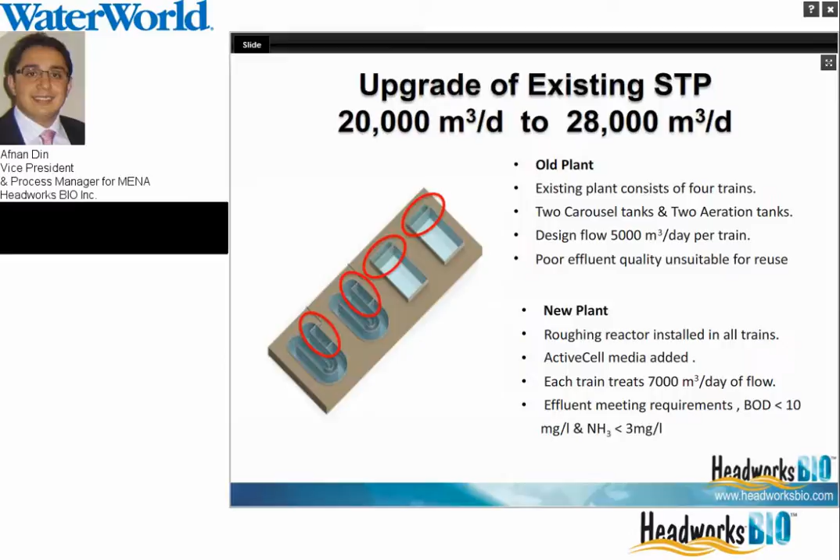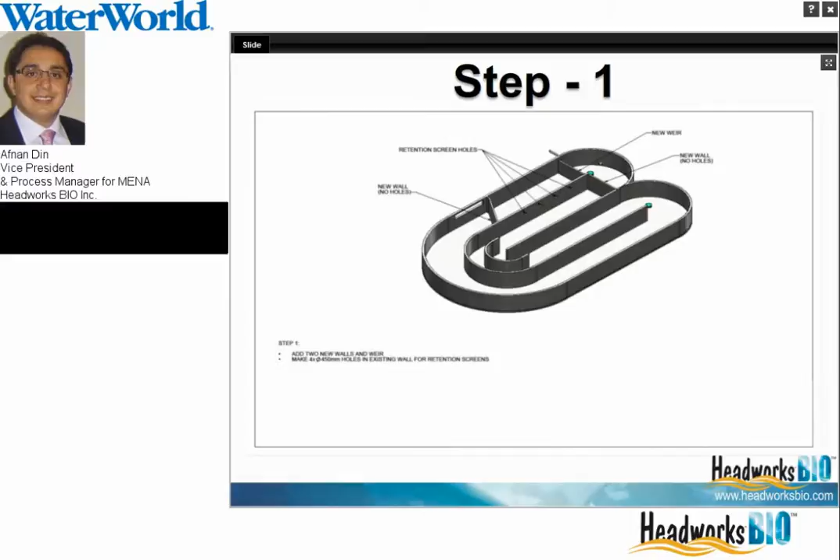So explaining how we did this, here's an example of a carousel tank. What we did was create an MBBR zone on the front end. As the flows enter, we create a wall. Flows go over a weir into the MBBR reactor. The MBBR reactor is fitted with aeration grids and retention screens, and then the flow, as I'll show on step 4, would basically enter from the MBBR reactor on the outer wall, on the outer lane, into the internal lane.

Now, it was a very complex solution, because we had to look at various different options on how we could implement the MBBR reactor. One of the key things you have to consider is the approach velocities, because if you don't have the right approach velocities, your media could go into one corner of the tank and stack up. So that's one of the things we had to consider.

We also had to consider which option would give us minimal civil construction inside the reactor. We didn't want to change the direction of the current flow pattern or build too many walls inside the reactor. So what we've really got is we've maintained the existing inlet, and created a sort of reactor where the flows enter. The flows go over the weir into the MBBR, and from the MBBR flow into the central lane, and the flow then takes its original route right round the racetrack to the effluent weir. We did not move the effluent weir.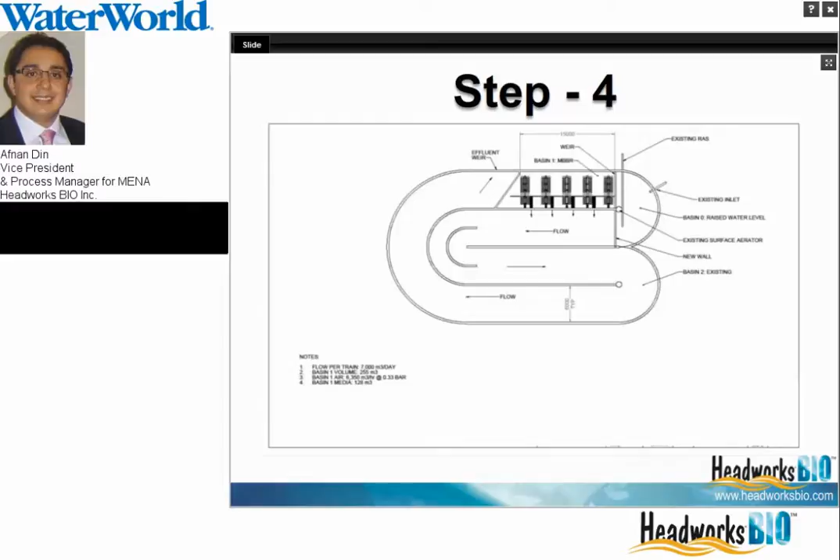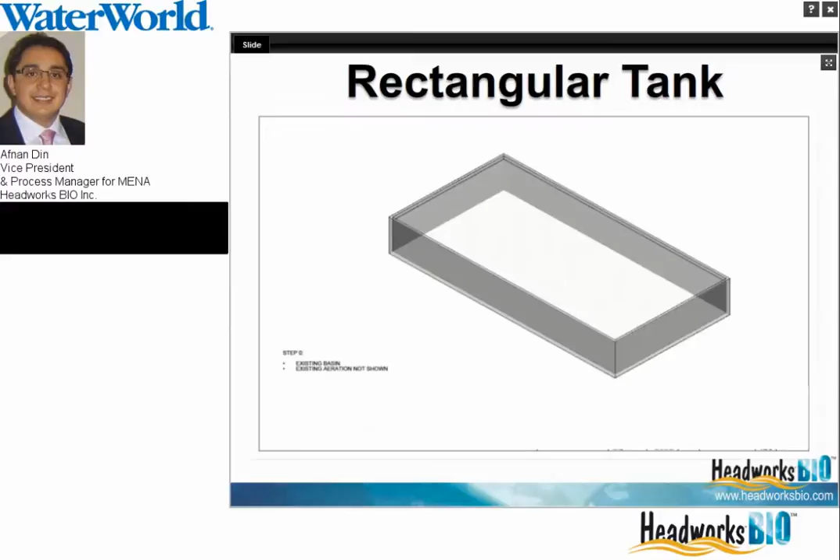And that shows you how it would look. For the rectangular tank, it's much easier because you have a clearer flow pattern. So what we do is create an MBBR roughing reactor at the front end by creating a wall inside the reactor.

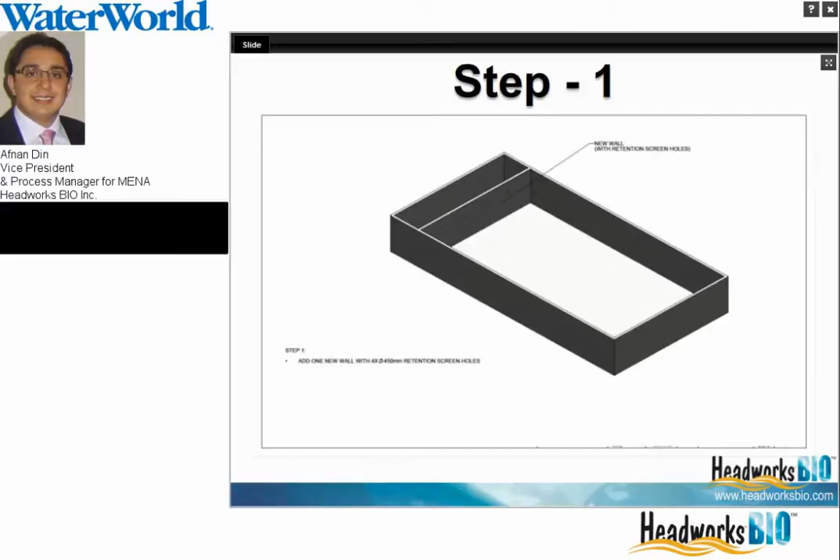We fit the whole aeration tank with coarse bubble aeration. The MBBR reactor is filled with aeration diffusers and sieves. And the flows would enter from the left into the MBBR reactor and would pass through the retention sieves, which prevent the media from escaping, into your activated sludge reactor, the existing basin.

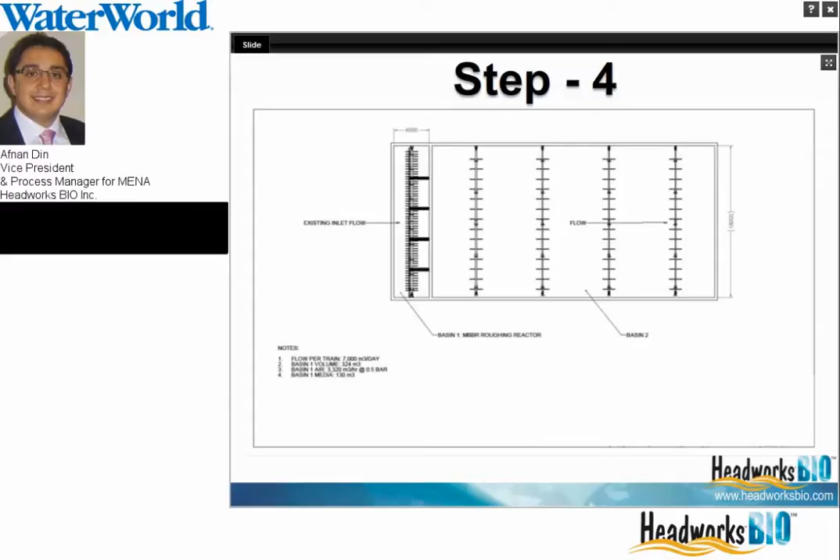So as a final overview, that's how the reactors would look. In the carousel tanks, the flow enters the MBBR reactor first, and then flows through the sieves right round. In the aeration tanks, it's a single pass system.

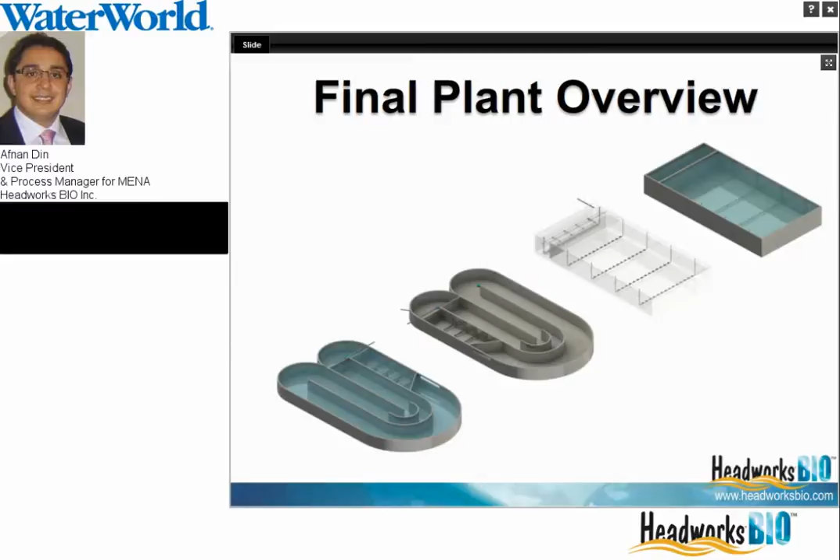One of the things we had to look at, when considering a retrofit and upgrade, is not just the aeration tank, but the whole process, especially the hydraulics. We also looked at the clarifier capacity, because sometimes there's a shortfall. By treating more flow and increasing the biological capacity, you naturally produce more solids. So you have to look at the clarifiers and assess the performance of the existing ones.

The current system had one clarifier per lane, and the clarifiers were huge. We assessed the clarifier capacity and looked at what we could push through them. We felt we could treat 28,000 cubic meters per day through the existing clarifiers - they were certainly oversized. To verify our results, we always carry out a BioWin model to look at the implications of increasing the flows and loads, to guarantee the final effluent quality.

So in terms of execution, that's the easy part, but a lot of effort and time goes into the upfront designing of retrofits, where you have to really look at the existing infrastructure and see how that fits into your proposed retrofit.

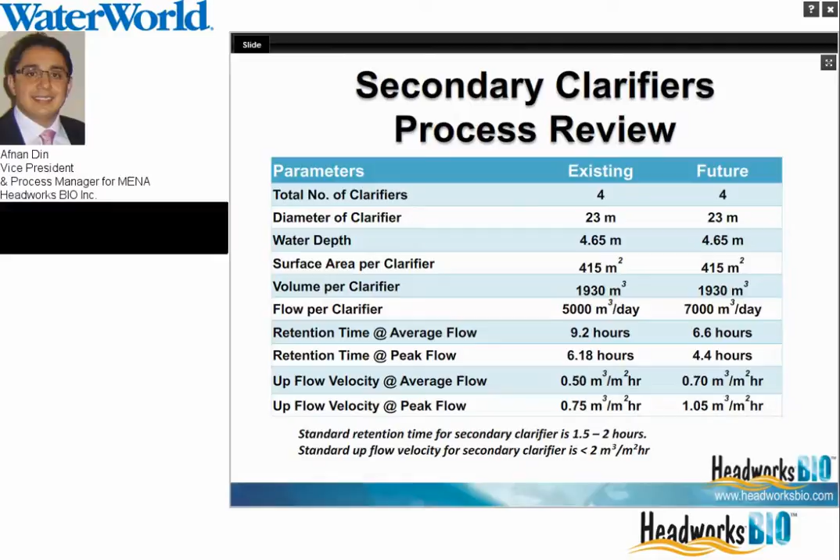From a client's perspective, the client is super delighted, because he's maximizing the use of his existing assets. He's able to increase his capacity by 40%, which is great because he doesn't need new civil construction, and it saves time for planning permission, getting new land, and availability of space. Minimal civil works means the lead time in executing such a process is much shorter, so he's not waiting a year or a year and a half before getting his 40% increased capacity.

In this case, we were able to produce a consistent effluent of less than 10 BOD, 10 solids, and less than 5 ammonia. In terms of reliability and ease of operation, the MBBR reactor itself is very easy to operate. And mainly, the client can now reuse 28,000 cubic meters per day, which is a huge driver in a water scarce region where it probably rains once every 3 years.